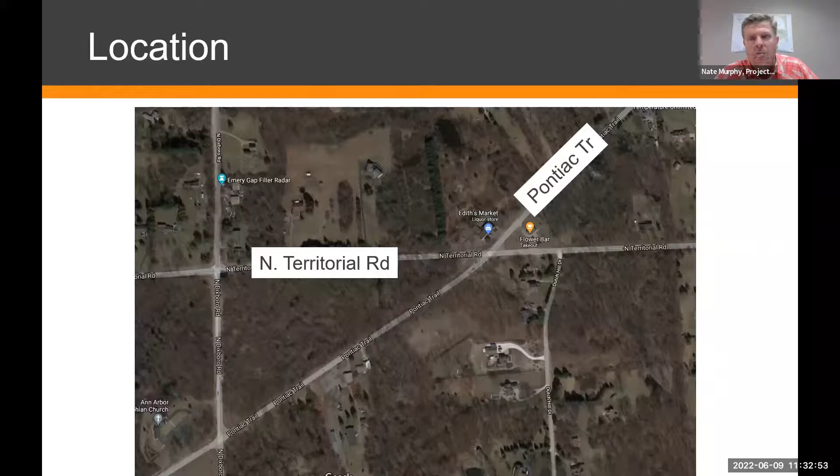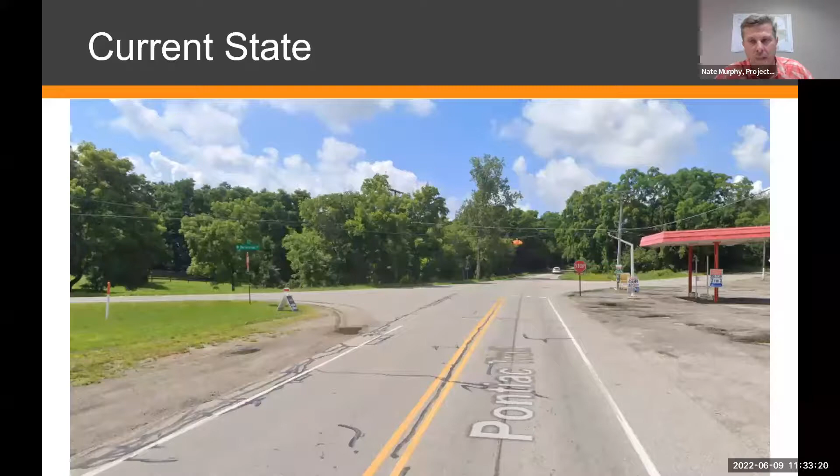The next slide shows the current state. So we have a flashing beacon there, a four-way stop, and that lends itself to more congestion. We are using the roundabout to both keep the user safer and provide a more efficient use of that intersection. So the next slide, we are building a single lane roundabout.

Currently, you might have seen some work going already. These would have been the utilities relocating their lines, etc. So the actual work for the roundabout has not yet started. We will be realigning the intersection to get a better flow of traffic, a safer alignment. We'll be installing drainage and storm sewer, constructing concrete curb and islands, as you've seen on other locations we've done in the county.

Similar construction here. We'll have the concrete curb and islands, we'll be placing the pavement, installing signs and permanent pavement markings, and we'll be doing the restoration as well as the lighting of the intersection.

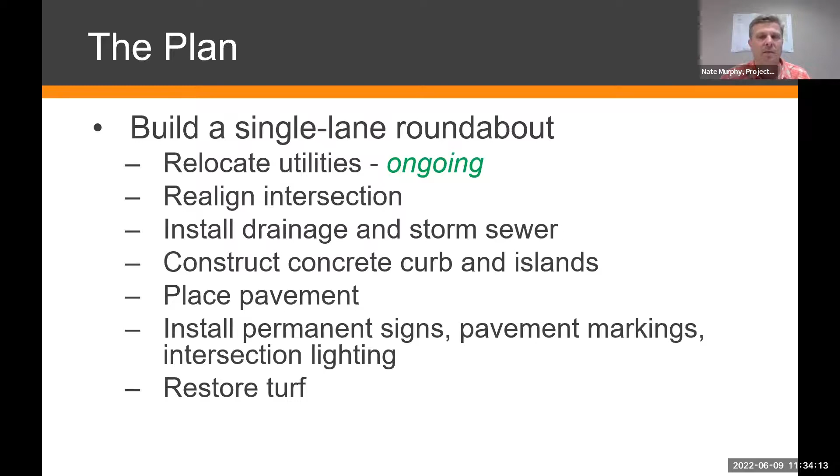Next slide, here's a look at what it will look like. You can see on the south leg quite a bit of a change in alignment, and that is to make the intersection as safe as possible. So we will be moving the alignment. The existing road there will be obliterated, it'll just be planted with grass again, but the alignment will be shifting there on the south leg.

And also at the north leg, you can see it's slightly to the east a little more. You can see on that illustration it shows the islands that we're accustomed to at this point, and access will be maintained for both the residents and the businesses there. Go to the next slide.

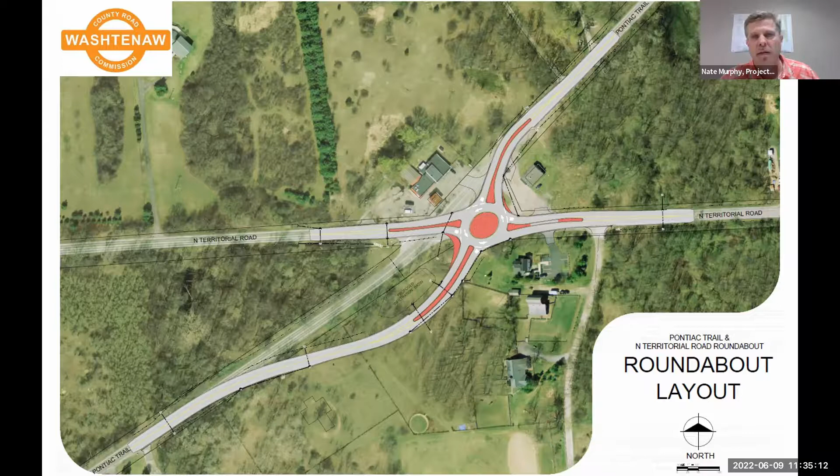The funding for this project is through federal funds, as well as the WCRC's allocated funds from the Michigan Transportation Funds, the MTF, and the low bid that came in on this project was 1.8 million for the construction.

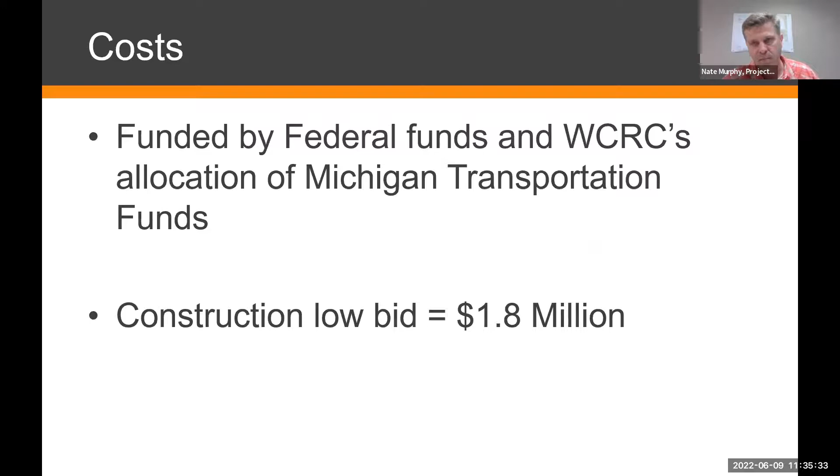We will be beginning the closure for this intersection on June 13th. You might see some work prior to that. We'll have a contractor on site mobilizing, moving his equipment out to the site this Friday, and we'll be doing some clearing, like mowing in some of the areas. But the intersection will be closed starting June 13th, that would be Monday, and we'll be closed for approximately 15 weeks.

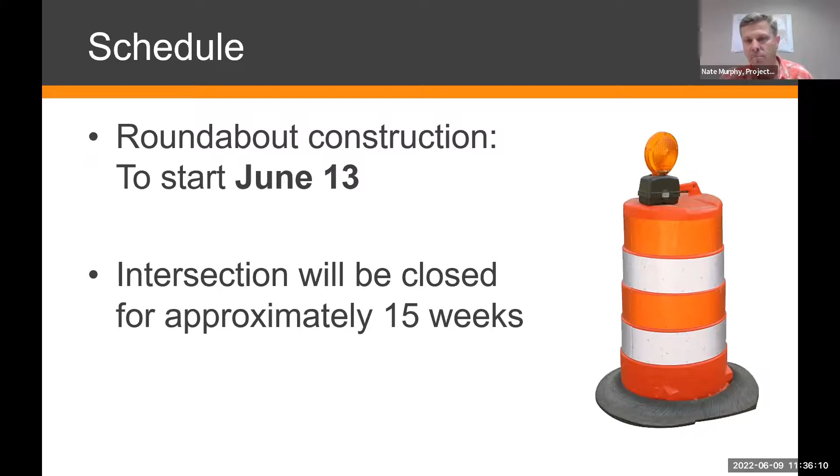Our schedule, as I said, 15 weeks, is dependent upon a lot of different factors, weather being the biggest one. We're always at the mercy of the weather. But there's other ones too. We have supply chain issues, as many of you've heard in the news, a lot of things going on with that. Unexpected utility conflicts - when we get into these kind of projects, there's always something outstanding that can cause a delay due to conflicts from different utilities, and then just our contractor scheduling. So we do our best to keep on schedule, but there are some impacts that could affect that, so just be aware of that.

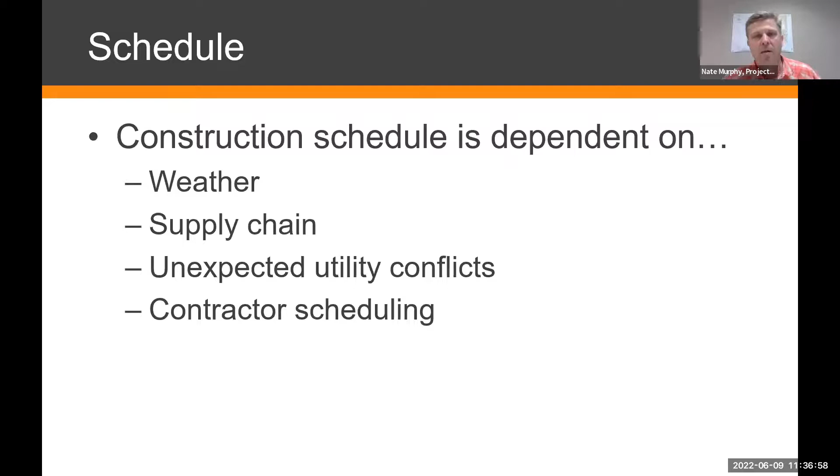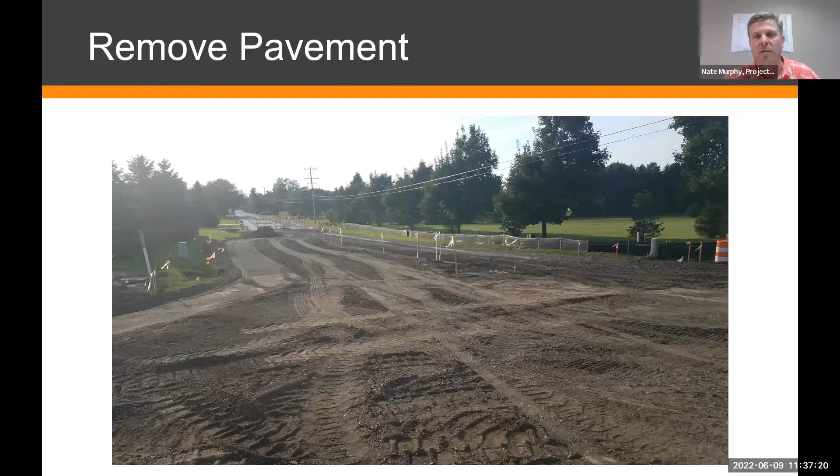This is another location we did a couple years ago that will look similar to this. Our relocated alignment will require additional work down in that pasture area on the south leg to build up the road in preparation for construction. So as we realign, we'll be backfilling and compacting material to prepare for the new roadway surface.

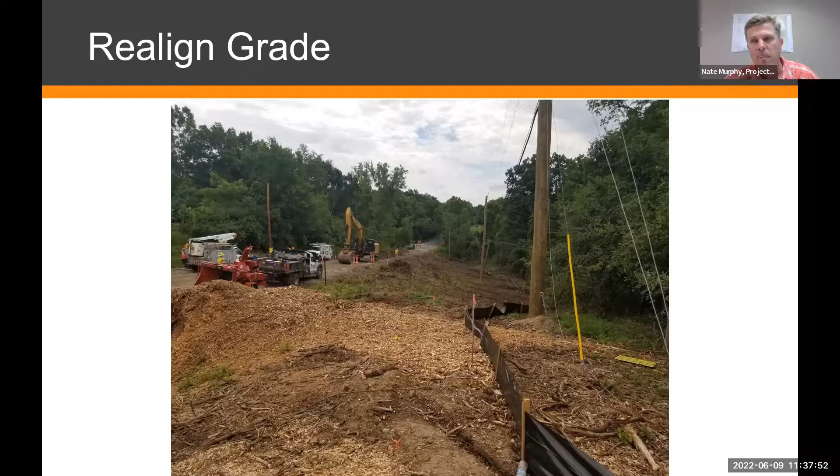Then we build up the roadbed with the sub base and then the base material, the gravel material, and upon that we compact it, and then we would be placing the curb.

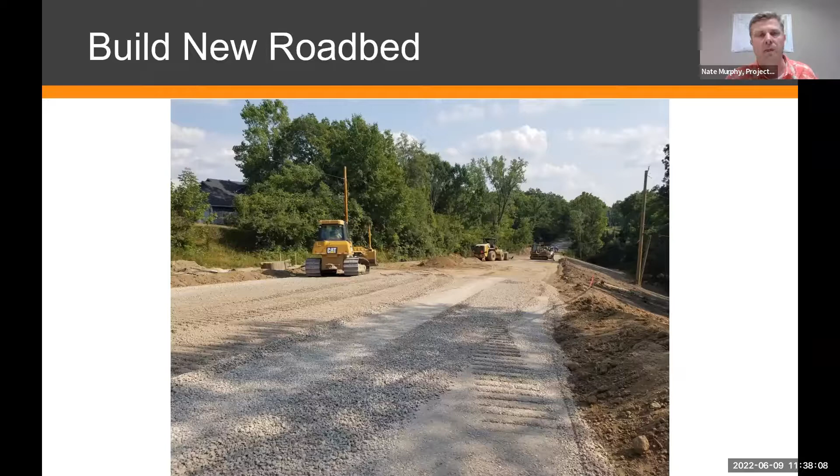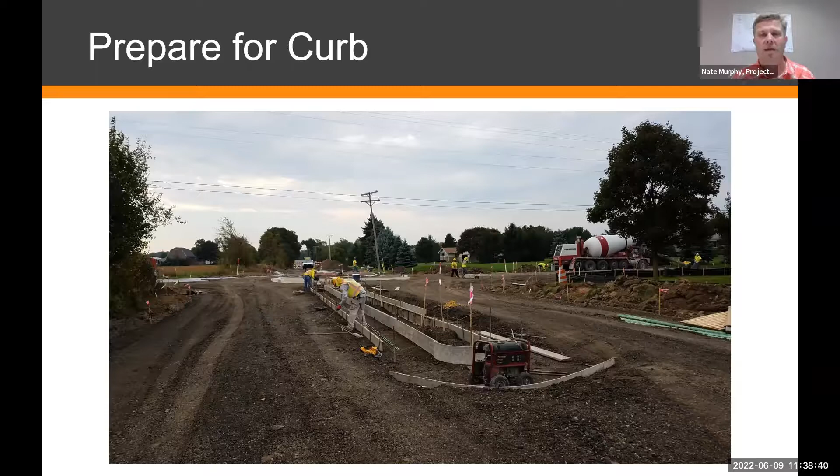That's the concrete being placed for the curb. And then the islands - we have splitter islands here. You can see this is a picture of a splitter island, and those will be filled in with concrete as well.

We'll be using a red dyed concrete, stamped on this one, so it'll look like brick. The red is used to make the island more visible as you approach the intersection, the roundabout. It gives a visual cue, so we do that just to help facilitate visibility - it's easier to be seen as you approach it.

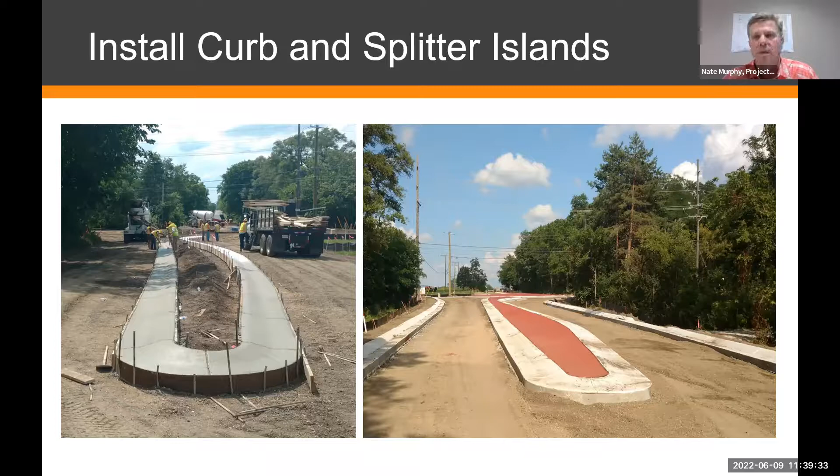This maintains the sight distance. We will not be doing any landscaping on this one. You might have seen in other locations around the county a center landscaping area - this one will not have that.

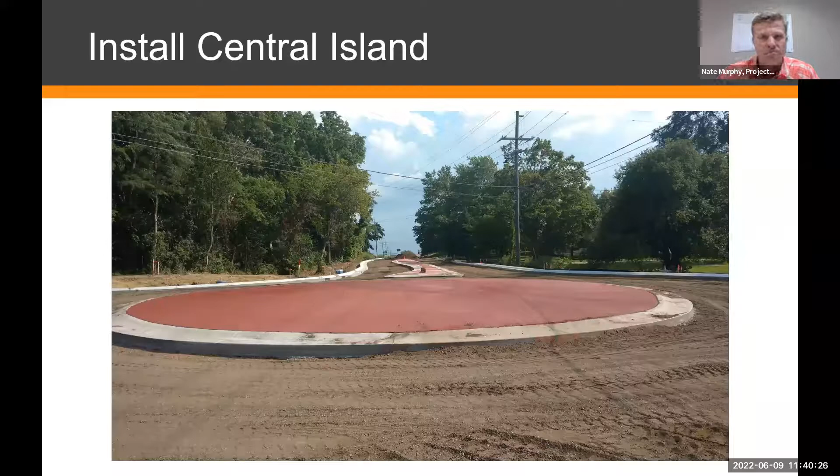After pavement, the permanent signs will be placed. All roadside ditches will be completed - that'll help finish the grade there and make the drainage flow properly. You can see there will also be lights added so that the intersection is properly lit for the user.

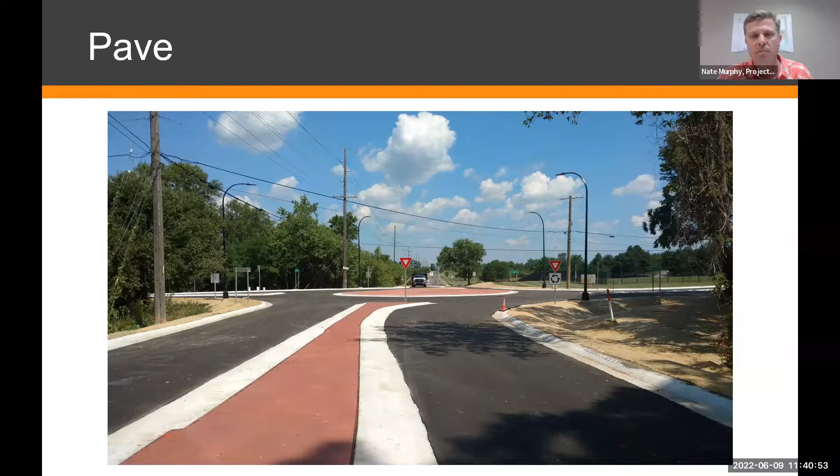So the pavement markings you can see in this one will have the arrows, the typical yellow and white stripes. And again, the street lighting will be added to provide a certain level of lighting so as to keep the roundabout safe at night.

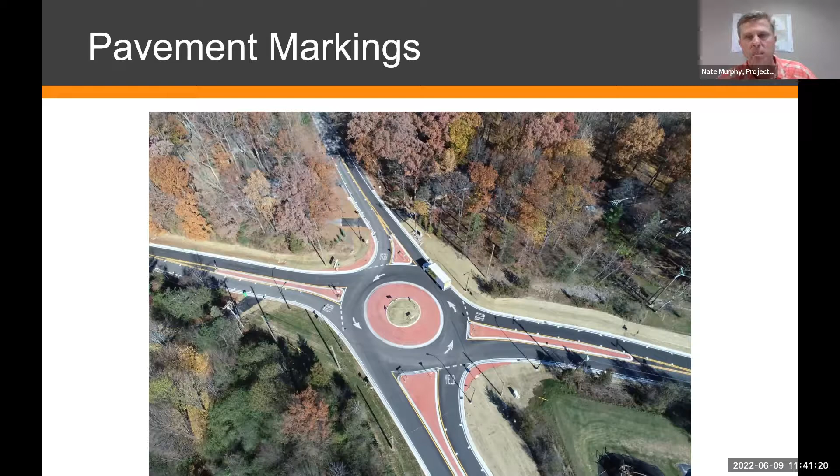Next slide. We just want to talk a little bit about the closure. We will be doing a hard closure on certain legs. I'll show you that in a map in a minute.

These closures are for the safety of the workers, and we want to make sure that all traffic is kept outside of the work area as much as possible. We do our best to close it up so that there's as little traffic moving through there as possible. This is a safety issue for the workers, and we try our best to keep as many people out as possible. At the same time, we will be maintaining access for local residents that are within the area of the work and the businesses, and I'll talk about that in a minute.

It's a safety issue, but it's also an efficiency issue. So if we can limit the traffic going into the intersection, then that can really help us to speed up construction, right? Yes, correct. So we can do it safer and we can do it faster if we do it this way.

Okay, next slide. Our detour that we have posted, as these are paved roads, we are keeping all of the posted detour on paved roads, and it goes Dixboro to Plymouth Road, going north to Curtis and over to 6 Mile. That's our posted detour. Our contractor is starting to get those signs in place right now, but that will give guidance to the user as they approach this location. And those are all paved roads. So for trucking, etc., we try to make sure that the posted detour is on the same material as the road that we're closing. Next slide.

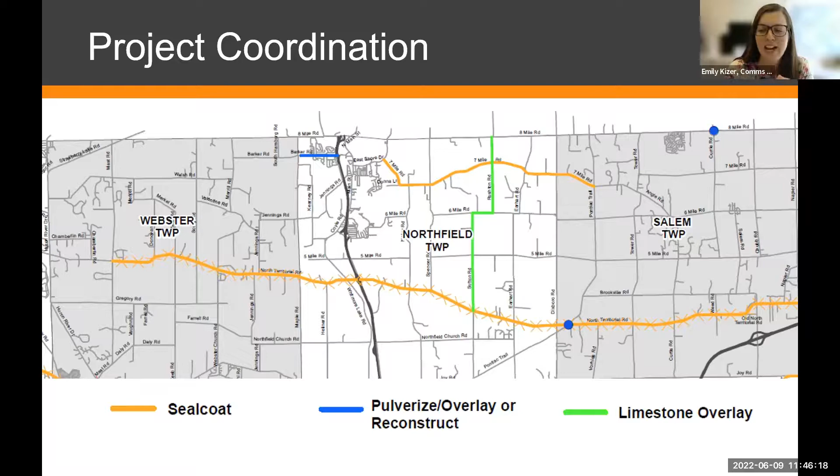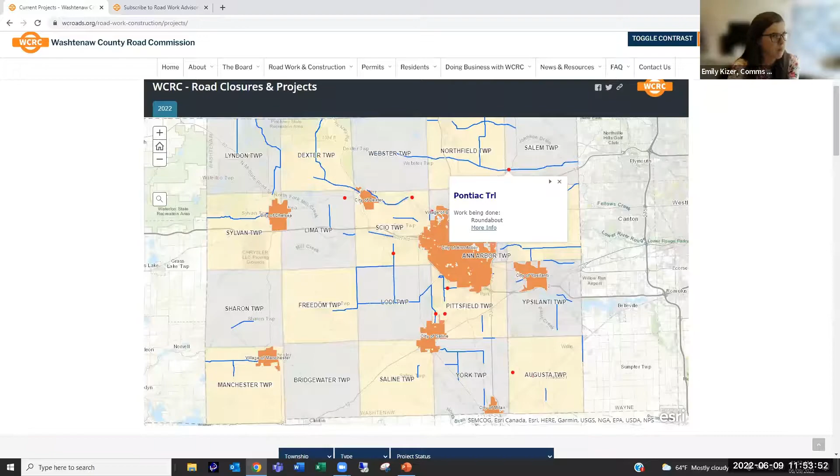With that, we will dive into our Q&A. We've had people coming in and out, so before we jump into the Q&A, Nate had a few FAQs that we thought might come up that we wanted to quickly go over.

Again, on closure length: we are starting this road closure on Monday, June 13th, just a few days from now, and we expect it to last about 15 weeks. We always hope we can get it done faster than that, but that is our expected time frame right now.

There will be no through traffic during construction within the intersection itself. But as Aaron and Nate have both talked about, we will provide access to the businesses and residents within the construction area — no traffic will be able to traverse the intersection itself.

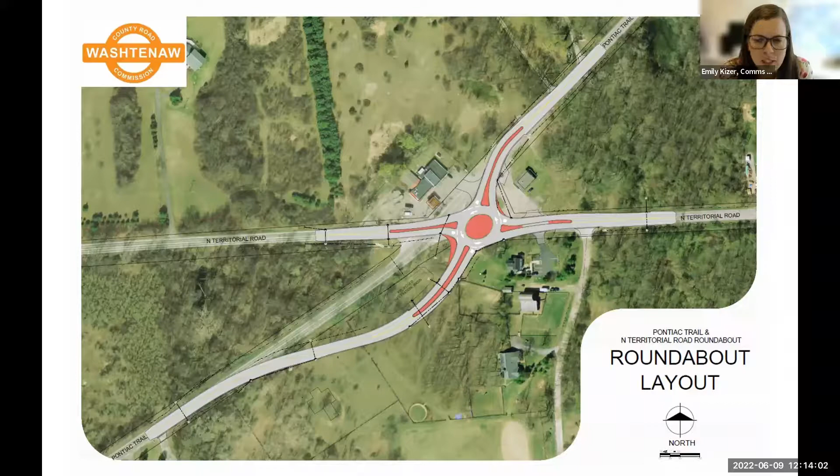We've got a few in chat. We talked about grading. Marianne is asking a little bit more about the detour, specifically for North Territorial Road. So if people are traveling on North Territorial Road, what is their detour? This detour really looks like it's for those traveling on Pontiac Trail.

Nate, you want to talk a little bit about that? Well, hopefully your mic's working. Can you hear me? It's better, but you're still a little quiet. Okay, I'll try to speak up. Yes. Sorry, Nate, we can't hear you. Burke or Aaron, can you help us out? I'm sorry, Nate. Emily, ask the question again, please.

Marianne feels like this map looks like the detour for Pontiac Trail. If she's traveling on North Territorial Road, is she following the same detour route? That would be the case, yes.

Essentially, if she's coming along North Territorial, let's say coming from the west, eastbound, when she gets to the intersection at North Territorial and Dixboro, there's going to be a barricade that says road closed, with an arrow pointing right directing her south. She would follow Dixboro Road south all the way down to Plymouth Road, where another sign tells her to turn left. She would proceed eastbound on Plymouth Road, and then there would be another sign at Curtis Road telling her to turn left.

And then she would go north on Curtis to bring her back to Territorial. So again, there would be that advanced signage for the traffic on North Territorial Road as well, letting those motorists know that the road is closed ahead and that they need to follow the Detour sign.

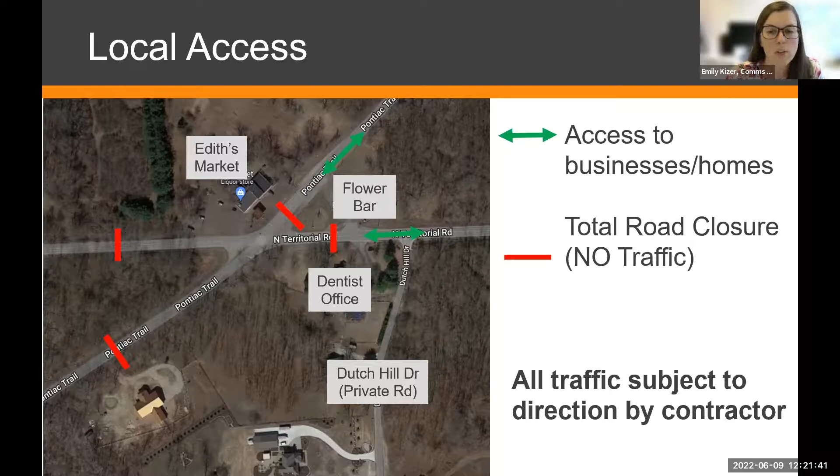We agree, David. We're happy to help. We've got a lot of information on our website about how you can navigate roundabouts, where roundabouts are located within the road commission. There's a lot of great information out there, and we've done a lot of outreach over the years to help new drivers in driver's education, and older drivers who maybe it's been a few years since driver education. So we're trying to do our part, and we appreciate anybody else's help in trying to educate the public about roundabouts.

At least in Washtenaw County, we're seeing a lot more of them over the last 10 years, and people are getting more used to them, but there is still a learning curve. So please check out the information on our website, under our FAQ section.

This is a question from Jan about drainage. She said Nate spoke about sewers, our storm system. There are no sewers in Northfield Township, so where will the water runoff go when we talk about storm water management here?

Right, yes, correct. We're not going into a sewer collection system like in Detroit or something. What we will do is collect the water, the runoff, through the roundabout. As we're adding paved surface, there's more water that we need to funnel off of the roadway, and it'll go into a catch basin, a little opening in the side of the curb there, then down and outletted into ditches created around the roundabout.

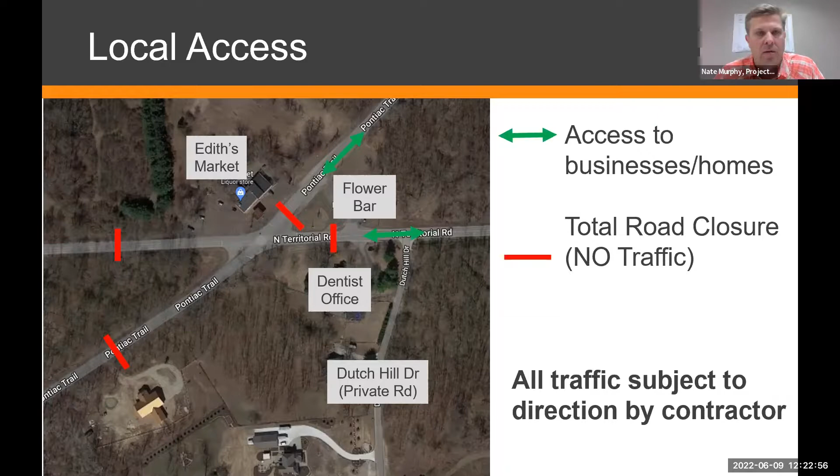All right, we got another vote for the turn signal signs at roundabouts. They're a big fan, so we appreciate that. We're glad to see some roundabout fans out there.